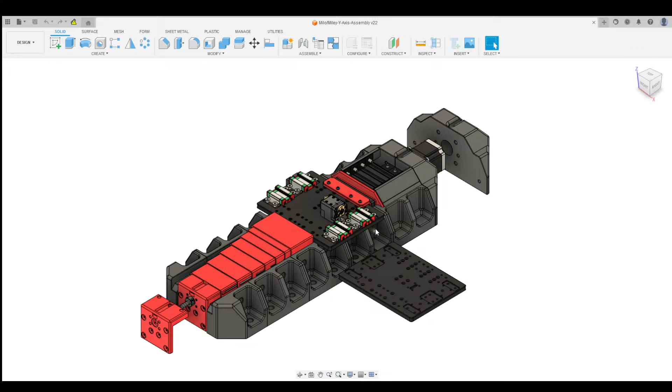And speaking of which, let's get Fusion up. Ooh, why is my Fusion window not working? There we go. Right, so this is the y-axis. It's really simple to build, but there is an order of operations you need to go about when building it. So effectively we're going to ignore the skirts for today, and we're just going to focus, not the skirts, the hold downs, and just focus on the main metallic assembly.

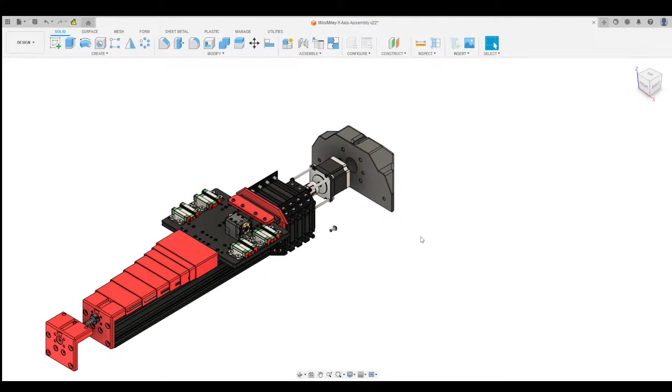Which of the y-axis motor mounts did you decide on? Did you go with the split one or the full length one? I think I did the full length one. You did the full length one. Okay, so we can work that out in a bit. It's basically the same assembly, just split down the middle. Oh yeah, because I think the full one fit on my P1S, so I just did that. Yeah, it fits on my P1S as well, so it makes sense. Right, so let's take everything away.

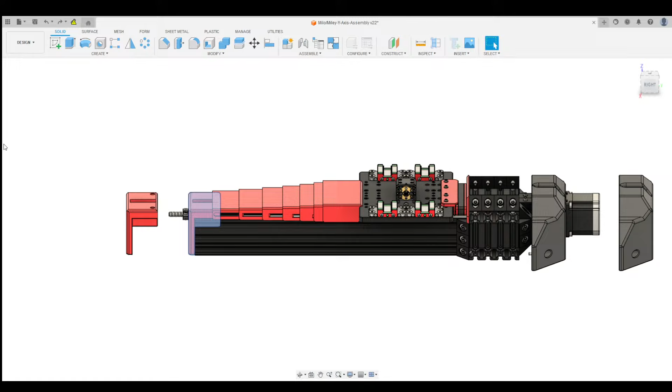Might be a little nicer if I actually have my face on stream for once. I know you guys hate my face, but come on, you gotta deal with it sometimes. So the first things we'll need is the second longest C-beam, and the 2080 flat extrusion. Now, if LDO got this correct, they've tapped both sides of it.

And then we're just going to get the Y-axis bearing block. Now, we don't actually need to assemble the bearing block right now, but it just helps to do all the bits and bobs beforehand.

Do you have your soldering iron on you? Have we forgotten to prepare? No, we haven't. Okay, cool.

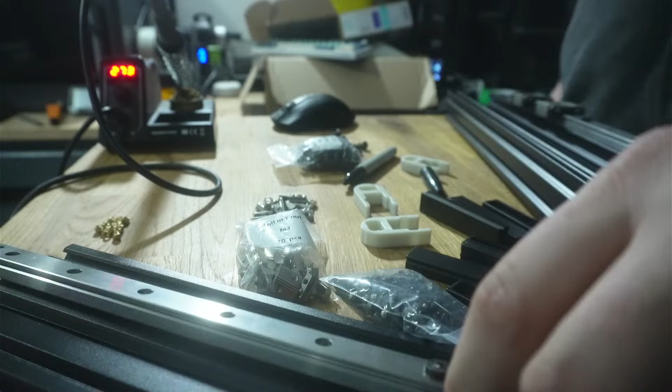Oh no, it's Discord that's doing it. I mean, Discord didn't really want to comply at the start, so I wouldn't be surprised. What on earth is happening? I'm gonna video this because you guys won't believe me, I'm gonna video this and put it on Discord.

This is currently what Discord is doing, and when I open OBS, something balked. Windows is behaving really weird. Jesus, nothing wants to go right this stream. I guess the world really didn't want this stream to happen. First UPS, now Discord, and now OBS too. And don't forget Brisket, Brisket also tried to get the stream cancelled. Oh yeah, true.

What's chat saying? Right, I've stuck it in general chat for people who want to see what my monitors are doing right now.

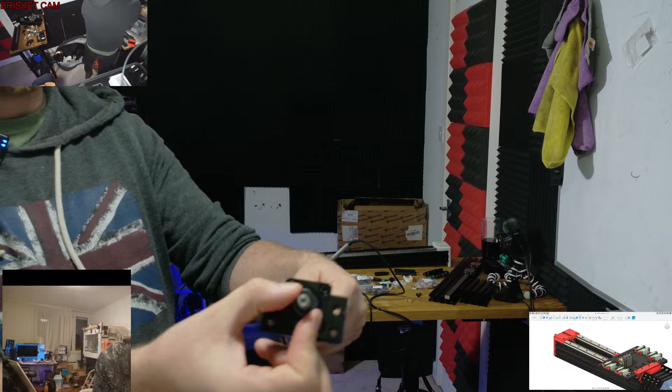So generally, I've got an example of a ball screw here, let me come closer to the camera. Ball screws have one flat end and one machined end, and the machined end is a lot thinner than the actual diameter of the screw itself. This is a 1204 ball screw, so 12 mil here, reducing to an 8 mil piece here. Generally you've got one floating bearing, just a normal roller bearing, which can move back and forth so it can grow with the thermal expansion of the ball screw. The other side has the only bearings that can take an axial load, that up and down direction, and you secure it in place with a little square nut that screws into the back, which stops the screw from moving back and forth.

I'm guessing, Hans, is this the piece you're missing? Did you forget to install this bit, that little nut there? Oh yeah, yeah, yeah, yeah.

So basically my ball screws are not even secured. I'm really surprised that when I first did the test cut I uploaded to Showcase it actually finished, because the screws weren't even secured at all.

I only follow this stream for Brisket and his weird balding friend. Oi! You're mean today. Stop taking the piss out of my hair, just because Hans has got luscious long hair.

Right, I'm going to take the other carriages off now. Whilst the carriages are off, it's a good idea to grease them up. The ones that came with the LDO kits, the test for them is that if they don't fall down when you pick them up vertically, then they're greased well enough. Whether or not you want to put more grease on them is up to you.

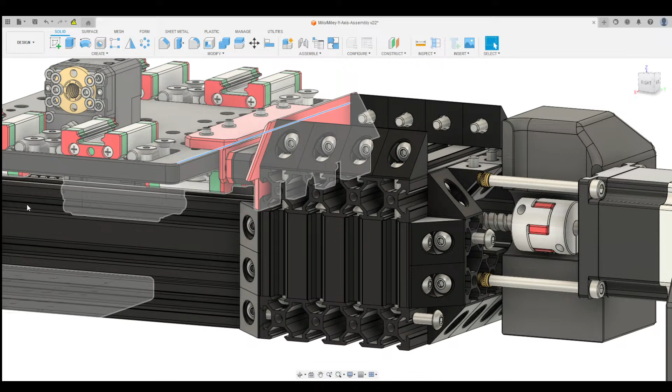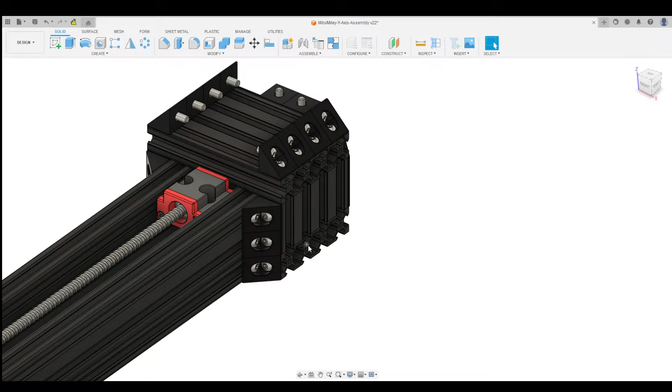The way it works is you have a big mass at the end, which kind of looks like a big hammer or a big mace of some kind, hence why I call it the Thor's hammer assembly. This wraps around the entirety of the extrusion, a big box that wraps around it and then gets bolted directly to it.

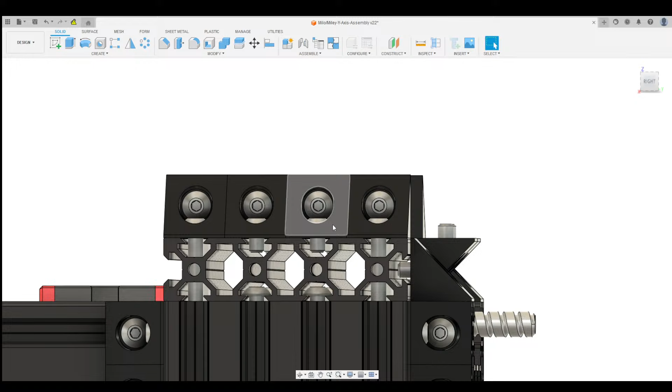This is to try and make this core as stiff as possible with as few bits as possible. Now, to make the trammability of things easier - imagine the Y column, the Z column is there, sorry, this is only the Y assembly for now. In order to assemble it and then use it, I need to do through joints in some places that go all the way through the extrusion, and in some places blind joints that only go partially through. The Z-axis connects to these corner connectors, and then the bolt for the front and back corner connectors goes all the way through the extrusion, down to the bottom, to try and maintain as much stiffness as possible.

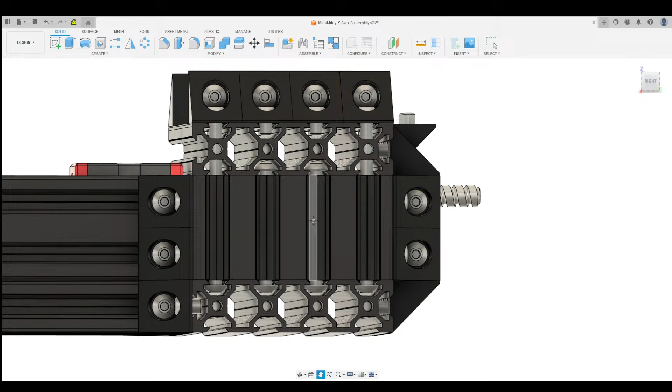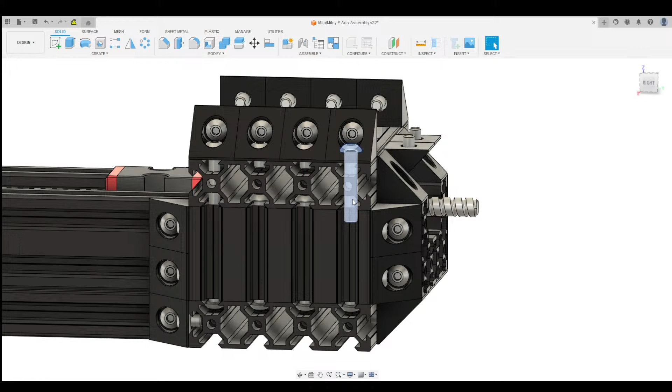The reason I don't do that on all four is because every time you took the Z-axis off, this plate here wouldn't be attached to anything. So I use the two center screws as blind joints to attach it together so the assembly stays intact, and then I use the outer ones to actually attach the Z-axis to the Y-axis.

Hopefully that made a bit more sense than I think it did. It's not a clever idea, I don't think - I think it's necessary to achieve what we needed to achieve.

Etal, how you doing, bud? Is it the same work area as on V1.5 and V2?

No, V2 is a lot bigger - in terms of square area, it's a lot bigger. The X-axis is 10mil bigger on Milo, actually smaller on Miley. Miley is 310, Milo is 350. V1.5 was 340 in X. On V1.5 in Y, that was 160. On Milo and Miley it's 200 in Y, and that's the big one - that makes a huge difference in what you can actually do on it.

V1.5 is 160, and then the Z-axis is the same at 120. Technically, Miley is actually 110 millimeters in Z, but that's just because the fixture plate is already pre-built into Miley. Whereas on Milo, if you took that fixture plate off you'd get the full 120, but with the fixture plate on it would still be 110. It's confusing, but they basically work out to be the same - it's just that the fixture plate is integral to Miley, but not integral to Milo.

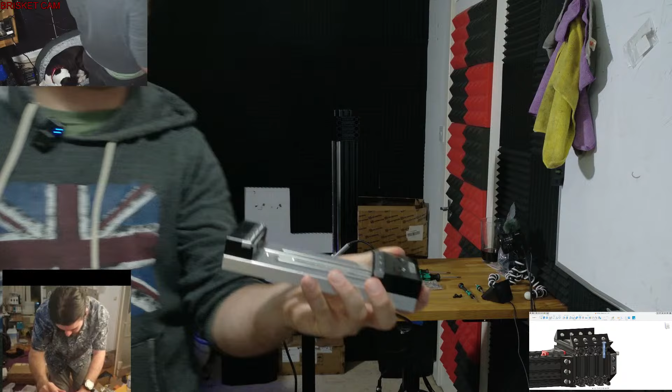But to be honest, I don't think I was ever limited by Z-travel even once. If you look at it like this - this is the Inception machine vice that most people use. It's a good thing my floor is carpet, because otherwise I would have ruined my vice. These are like 30 mil tall. And the LDO vice that's coming out - whether or not I'm allowed to talk about it, Jose - is about the same height, so you've still got 90 mils of travel you can use in Z.

The LDO vice looks really nice though. The only thing I've asked them to change is to put some steel jaws on it, because the current ones are aluminium, which isn't a bad thing in itself - the aluminium tends to actually grip a little bit better, but the steel jaws will last longer.

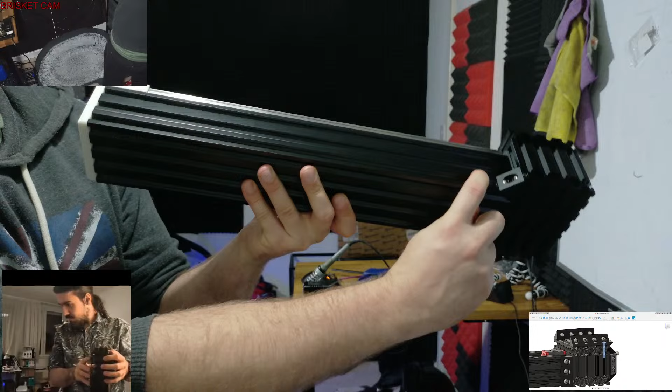It's kind of important that the C-beam, this extrusion here, and the 2080 here, don't have a gap forming in the middle because it means it's twisted. And that twist can propagate through the rails themselves. I felt there was a little bit of twist here because there was a little bit of a gap on this side but not on this side. So I just clamped it in this direction and tightened them up. So that twist is now gone, or at least it's mitigated. At the very least, it's mitigated.

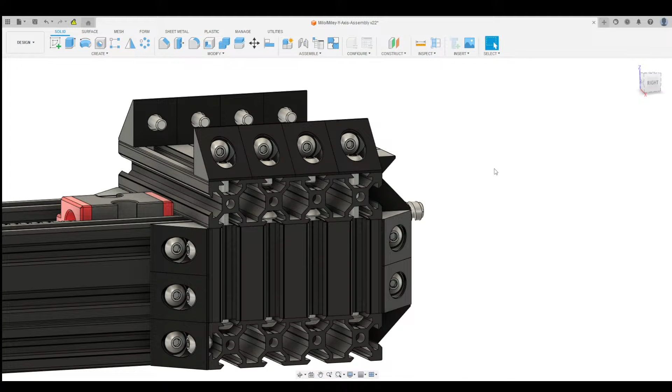Once you've done that, we're going to add 2 more corner connectors here on either side. We're going to put 2 on the back on both sides, so that's another 4. And then we're also going to fill a bunch of other spaces as well. If you want to see exactly which ones, here's the CAD. So we've just done these 2 bottom ones here, and we need to do 2 more on top on either side - these 2 here, these 2 here, these 2 here, and then these 4 at the bottom.

That sounds interesting, but I can imagine the price would be much greater. Yeah, I priced up the extrusions, just the extrusions the other day - it's over $1,500 just for the extrusions. So it's the entire cost of Milo just for the extrusions.

Hey Brent, anything I need to know before getting the CNC parts made, or should I just send it? You can get them cheaper if you use the manufacturing files and then tap everything yourself. So every CNC file, except for the fixture plate right now, has a manufacturing file where all the holes are sized correctly to be tapped. So all the M5 holes, for example, are sized to 4.2 millimeters so you can tap them by hand afterwards. It's a lot cheaper to do it that way if you're going through PCBWay or something like that.